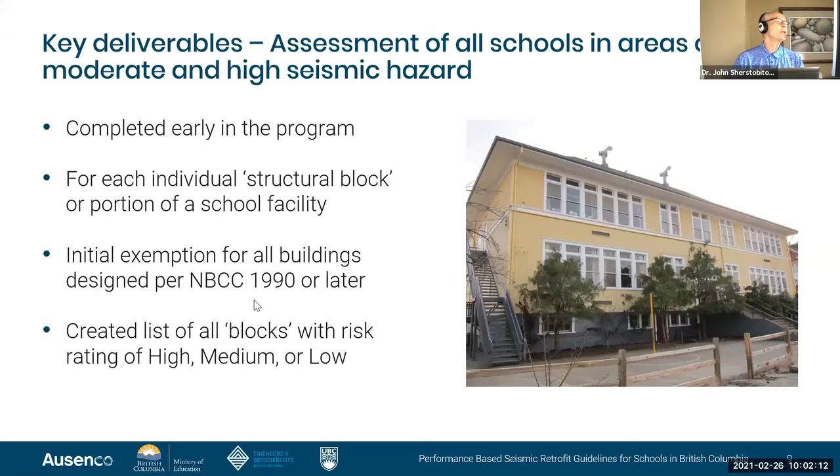Another key deliverable at the beginning of the program was to assess every school in British Columbia in moderate and high seismic hazard regions. Every piece of the school was broken into structural blocks because schools here in BC have been added on year after year, and each one had a different structural behavior. Initially, all buildings designed 1990 or later were exempt because studies showed they met minimum life safety.

A list of all the structural blocks in BC was created with a risk rating: high, medium, or low. Another key deliverable of the program was a custom database. Every school district, every school, every block had all the studies developed for them, and this was available to all the engineers to look at what was done in other school districts, other buildings, what had been done in the past, and it was a great database for the ministry just to record where the program was.

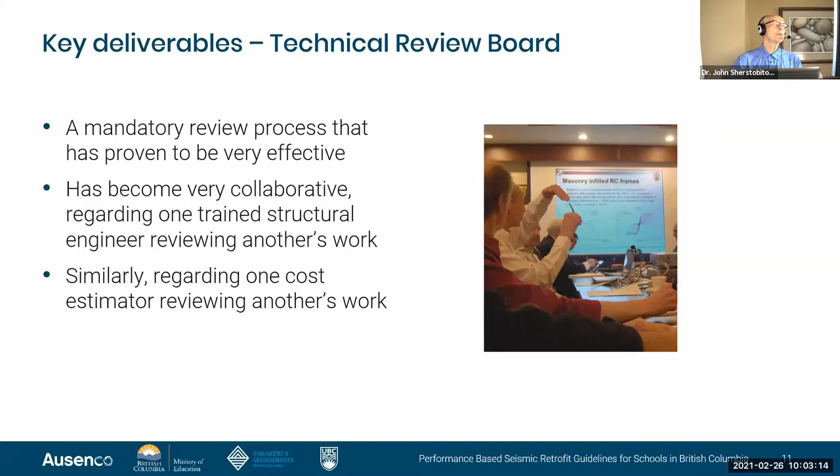Another key deliverable that was very successful was a technical review board. Every study was reviewed independently by another structural engineer, and every cost estimate was reviewed by another cost estimator. It proved to be very collaborative, with engineers reviewing each other's work, to make sure the program was implemented as the Ministry of Education expected.

The policy that the ministry put forth to the school districts: every high-risk building had to have a seismic project identification report done. What the ministry wanted and realized was a standard template. The fees for every consultant were uniform, so it was not about bidding low to get the work - everybody had the same fees.

It was led by structural engineers, and at the end of the day, a concept and a cost for a standalone seismic upgrade was prepared, including input from the architectural, mechanical, and electrical disciplines to make sure all the removal and reinstatement of those components was included in the cost. The technical review board reviewed both the structural aspects and the cost aspects.

Following that, a project definition report was prepared to send to the ministry to obtain funding for the seismic mitigation of the school or replacement. This report looked at options for an individual school: replace it, or is it more cost effective? Is it better to do a standalone seismic upgrade, or some combination? This included all the costs for phasing, accommodation, moving costs, and maybe local authority requirements like sprinklers or universal accessibility. This was now the true complete project cost for the ministry to provide funding to the district to implement the project.

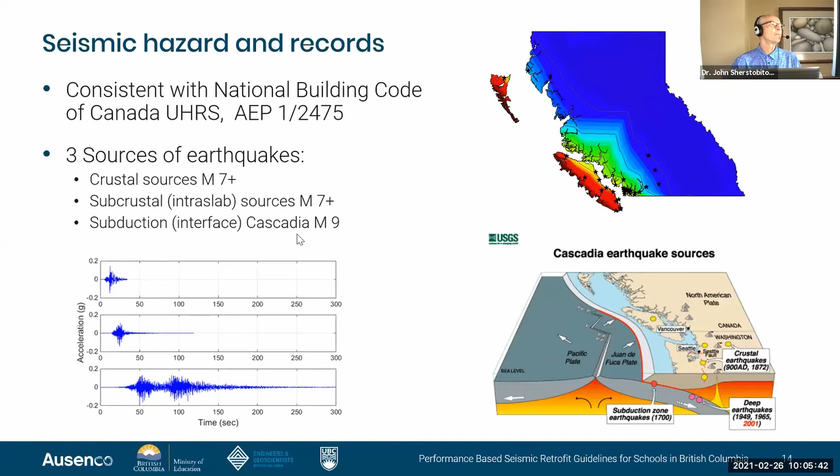So the analysis was done, and you'll understand this as I go forward. For each of those 3 earthquake sources, 20 ground motion records were selected, scaled to both high and moderate seismicity levels, scaled to a conditional mean spectra at either 1 second or 0.5 seconds. At the end of the day, for each of the prototypes selected for the studies, 240 ground motion records were analyzed to assess the behavior of each prototype in the system.

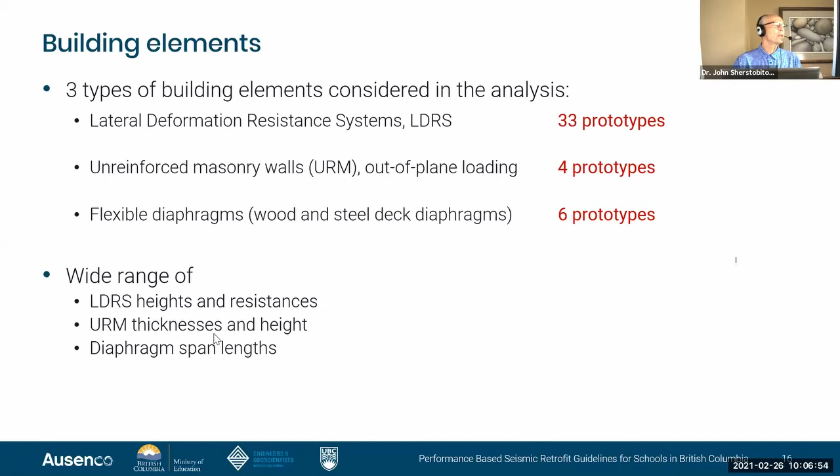In the prototypes, there were lateral deformation resistance systems, shear walls, bracing, and the like. There were 33 unique prototypes consistent with existing construction and new construction in BC, including unreinforced masonry walls that could collapse out of plane, and flexible diaphragms - wood and steel deck, typical for what we use here. A wide range of heights, resistances, and URM thicknesses were assessed as part of these analyses.

For each prototype - the lateral deformation system prototypes or diaphragms - backbone curves were developed either from experimental data or from literature, including the strength degradation of each of those prototypes. At the end of the day, a design drift limit was specified to achieve life safety, and there was a conditional drift limit to achieve collapse prevention for each of these components.

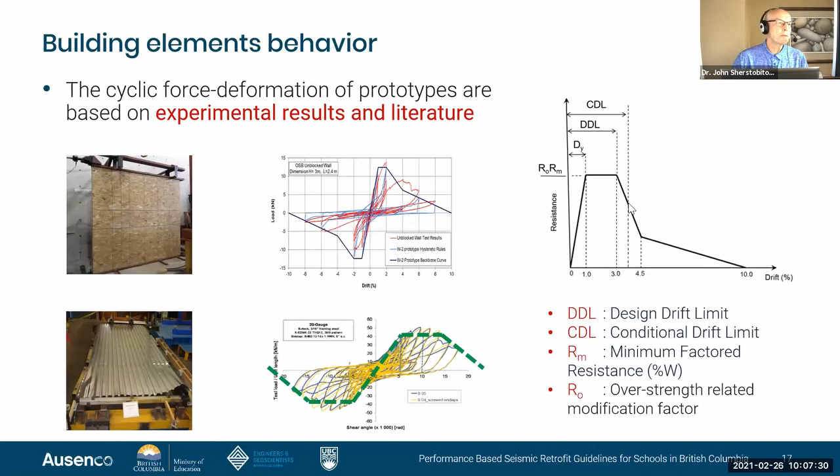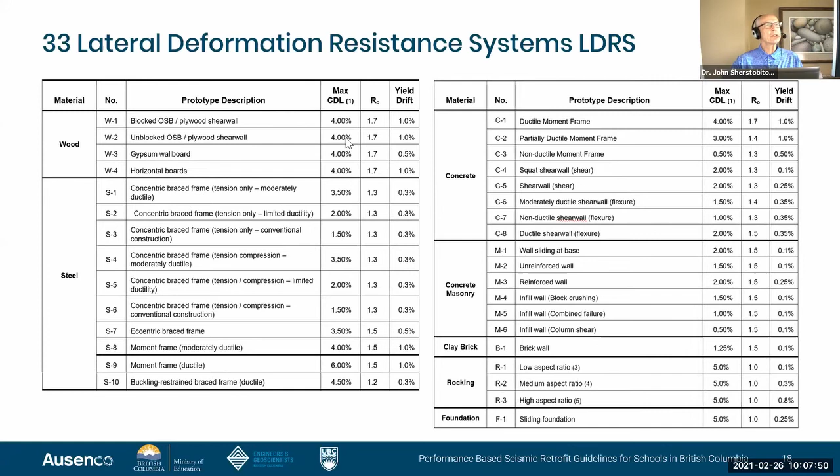This is just a snapshot of the variety of wood, steel, concrete, masonry, and clay brick prototypes that were assessed in the program, and the kind of maximum drifts that were allowed in the study for life safety performance.

Of course, the key in every seismic upgrade is to make sure that the vertical load carrying components remain able to carry the vertical loads. These are the drift limits for the various types of components to make sure they could carry the vertical load in the event of an earthquake.

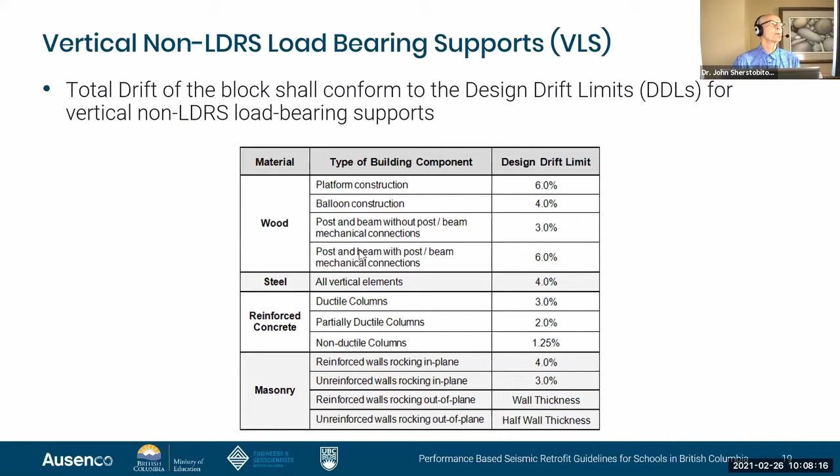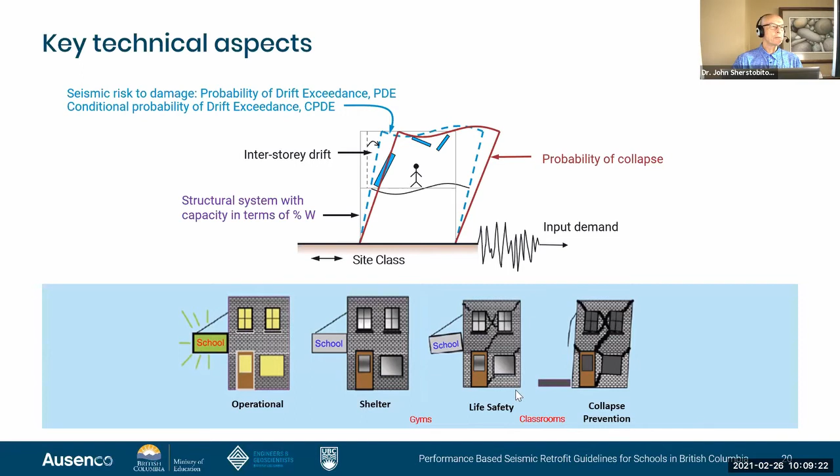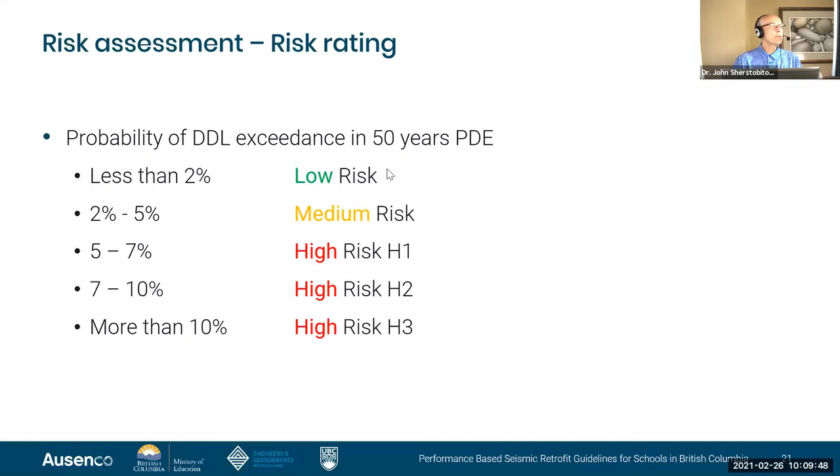So for all the buildings that were assessed, this probability of drift exceedance in 50 years - 2% in 50 years - was deemed a low risk, and we have the various categories of medium and high. The program right now is upgrading everything estimated as high risk to bring those to a low risk.

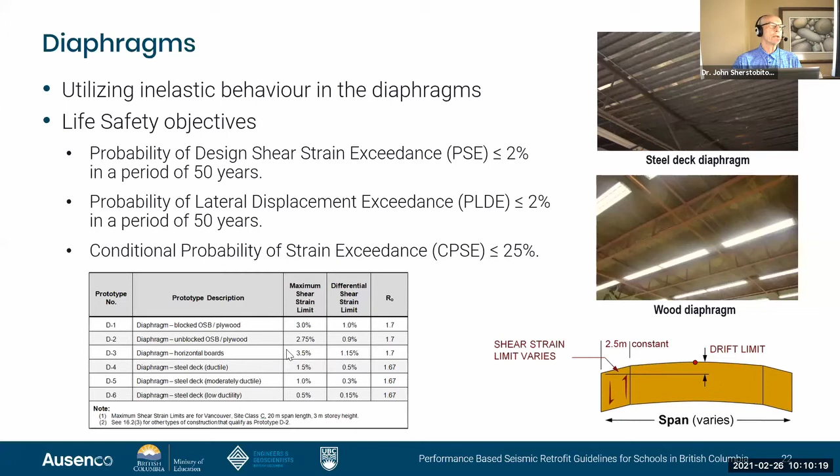Similarly to the lateral deformation system, the diaphragms were all analyzed for inelastic behavior to get the maximum capacity out of this in an inelastic behavior. Again, probabilities of strain exceedance or displacement, either a probability and a conditional probability, and the various diaphragms are shown below here, along with all those analyses I mentioned.

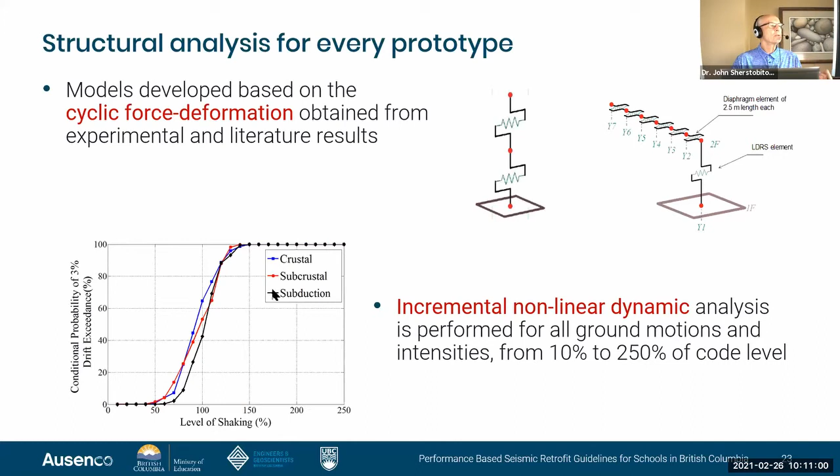So what did this analysis entail? Those nonlinear backbone curves, the nonlinear degradation performance of all the prototypes I previously mentioned, were analyzed both as lateral deformation systems and as diaphragms. What was done was incremental nonlinear dynamic analysis from 10% to 250% of that code level earthquake, to get these curves for each of the 3 types of earthquakes, to move into the probabilistic combination, ultimately to get a probability of drift exceedance in 50 years versus the factored resistance needed for that particular component. So everything was a probabilistic approach, consistent with the probabilistic approach of the National Building Code.

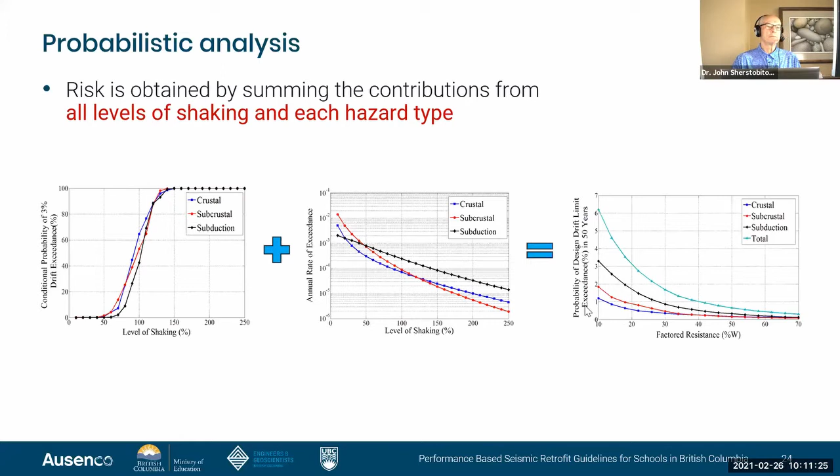So as I mentioned, the fundamental goal was a life safety performance objective: a probability of drift exceedance of 2%, meaning the probability that this drift over the 50-year lifespan of the building would be exceeded for all the earthquakes we can see in British Columbia.

In addition, there was a conditional probability check for just the 100% earthquake level, with 60 earthquake records run for that level, and a probability of drift exceedance of 25% as the strength degraded. So a little further performance, but still far away from collapse and collapse prevention.

As I mentioned, for gymnasiums, auditoriums, and cafeterias and the like used for shelter in place, an enhanced performance required that the components behave halfway between the yield drift and the design drift limit, so about in this range.

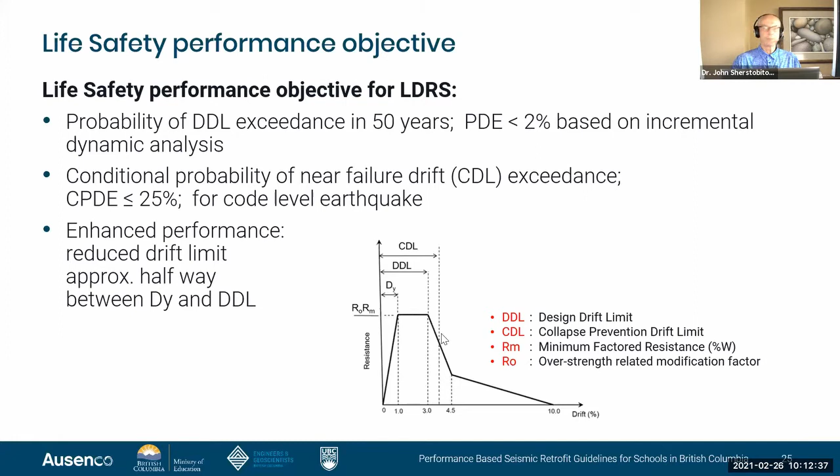So the seismic analyzer, I'll talk more about it. This was a tool to access all these pre-analyzed nonlinear dynamic analyses, used to perform risk assessment and obtain the retrofit resistance for drifts that would provide that life safety performance level. I'll speak more about this shortly.

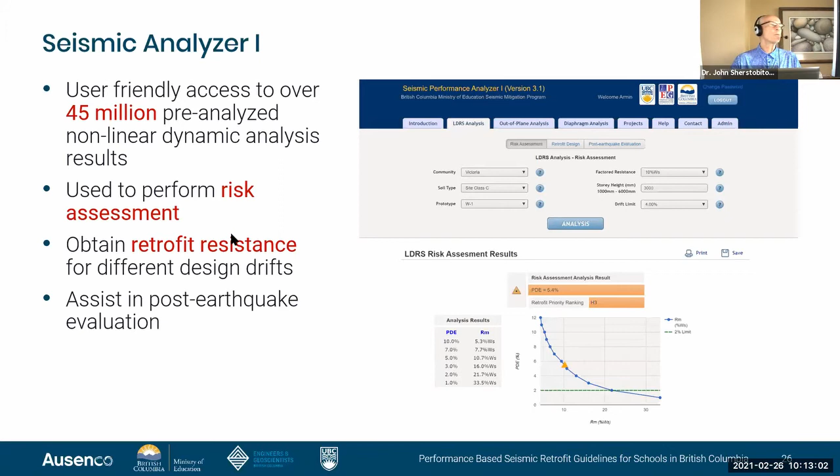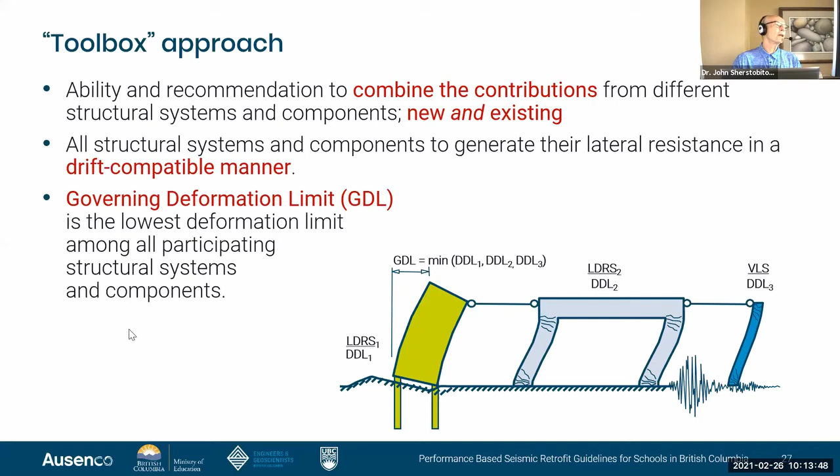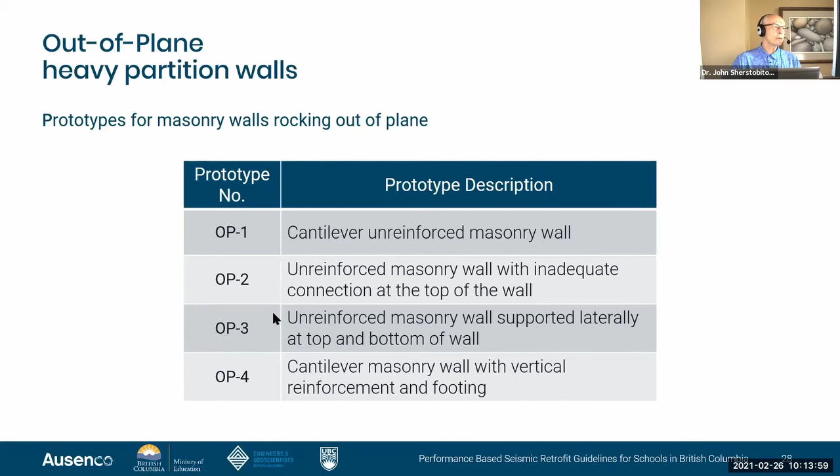Out-of-plane heavy partition walls, we have kilometers of these in our BC schools. There were 4 prototypes assessed. The most typical one is this prototype we called OP3, for out-of-plane rocking. As soon as the drift exceeded the thickness of the wall we get collapse, so we used that same probabilistic approach to make sure those had that 2% in 50-year performance of not exceeding that drift.

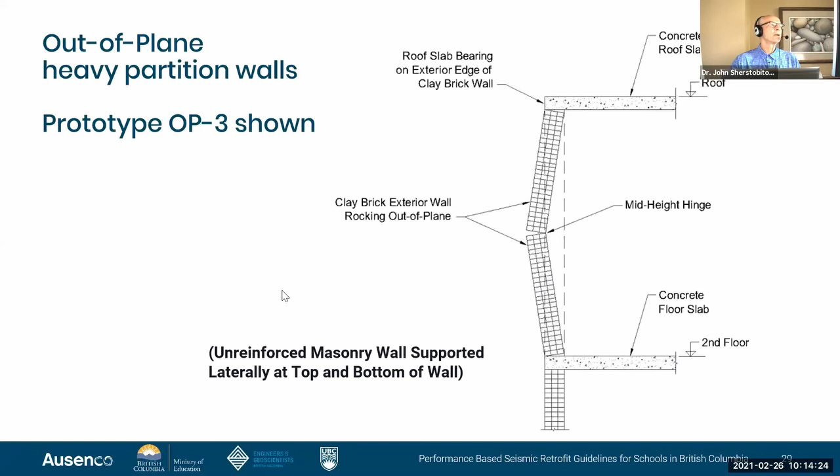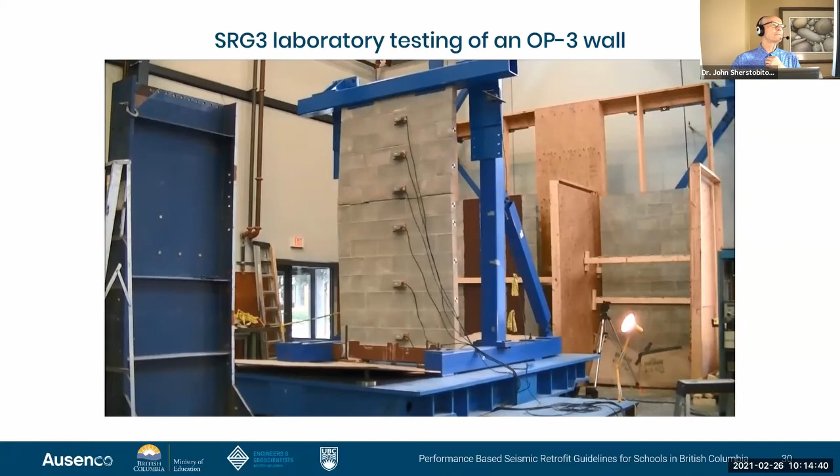There was a lot of testing done at the University of British Columbia on the shake table. Again, these are masonry walls that we have miles of in BC. We assessed many simple retrofits, this one being unistrut on one side of the wall.

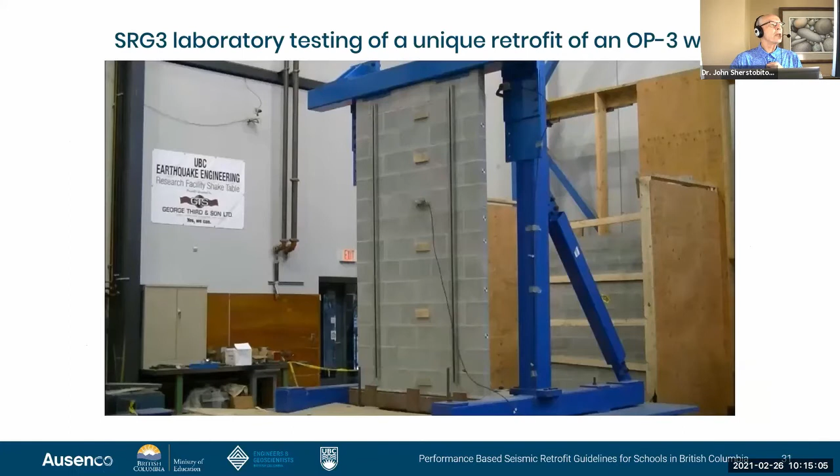The beauty of that testing is that we found very cost-effective solutions to implement on only one side of the wall to minimize disruption and interruption to the school program. Again, the one Chet showed was simple unistrut with masonry screws, not even connected to the floor above or below.

Another really important part of the program was a special study we did on liquefaction. We have many schools in liquefiable areas. What we found is that predictions using some of the previous empirical equations were too conservative for what we deemed inland schools - schools more than 300 meters from the river or ocean and with a non-liquefiable crust of 3 meters or larger, which behaved very differently than those schools near the water's edge.

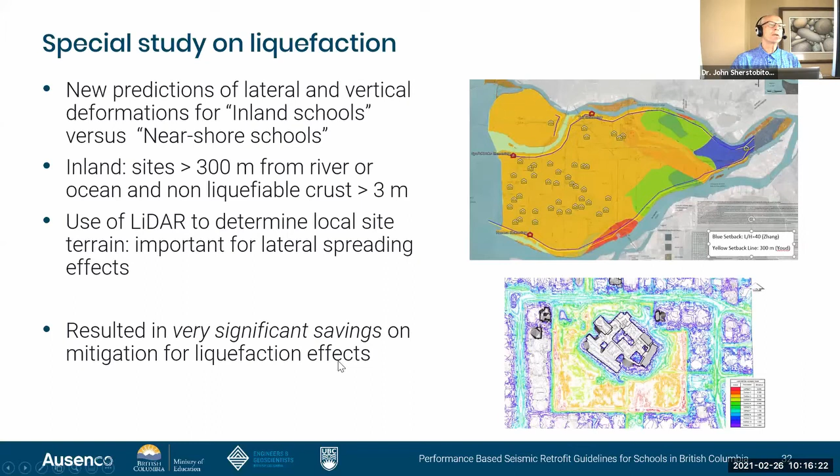So we used LIDAR to determine all the local terrain. We did analyses for a variety of schools and implemented simple guidelines that resulted in very significant savings for the mitigation of schools where liquefaction potential exists. This was an excellent study that just completed about 6 months ago.

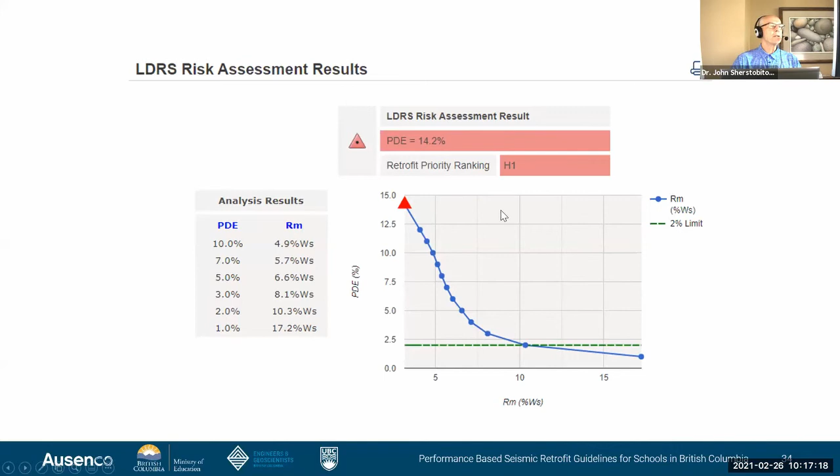You push the analysis button and it'll tell you whether you meet that probability of drift exceedance of 2% or not. This particular example shows no - it should be 2%, it's 14, it's a high risk. Something needs to be done to upgrade this particular structural block in a school.

So then again, for the same area, you select a prototype that is going to be used for upgrading. And again, when you run the analysis, it tells you the lateral capacity as a percent W that's required to achieve that 2% in 50-year probability of drift exceedance for this drift to achieve life safety.

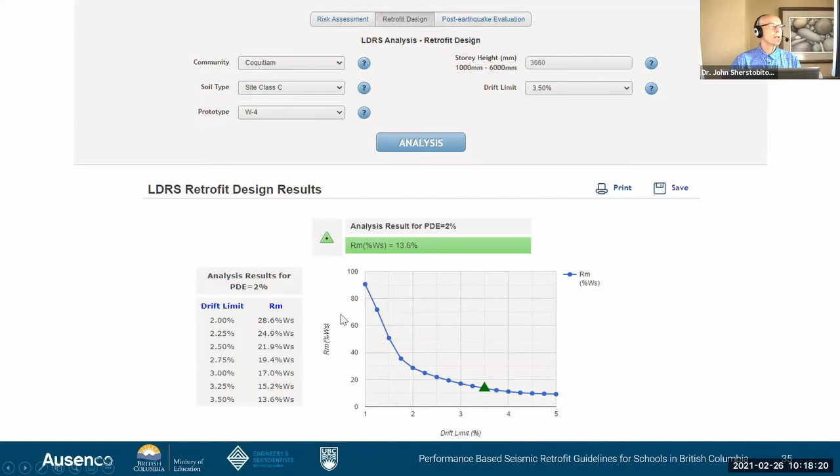If you recall, in the previous slide, this particular building had 4% existing capacity. It needs 13.6%. So the goal is you only add a new structure with 9.6%. You combine the existing with the new in a cost-effective manner to achieve that performance that's expected.

So the intent of the analyzer is to look at all these options.

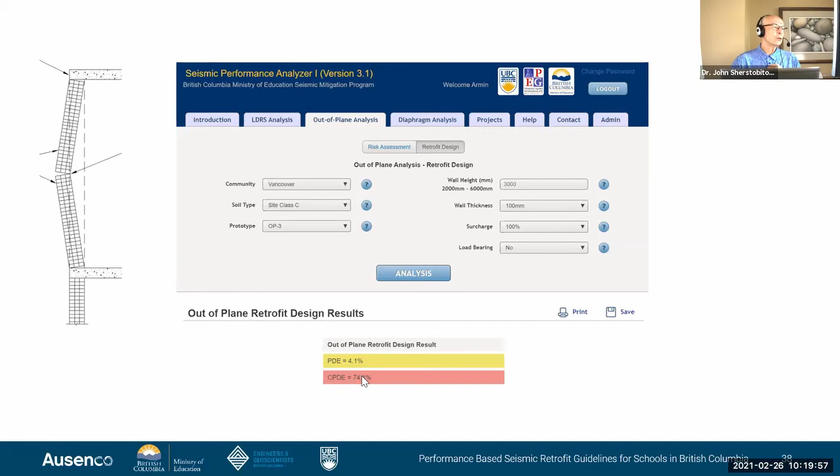This analyzer is also used for out-of-plane walls, again to achieve PDE 2% or 25%. It allows the engineers to look at options of reducing the height and adding restraints to achieve the PDE and CPDE that's necessary.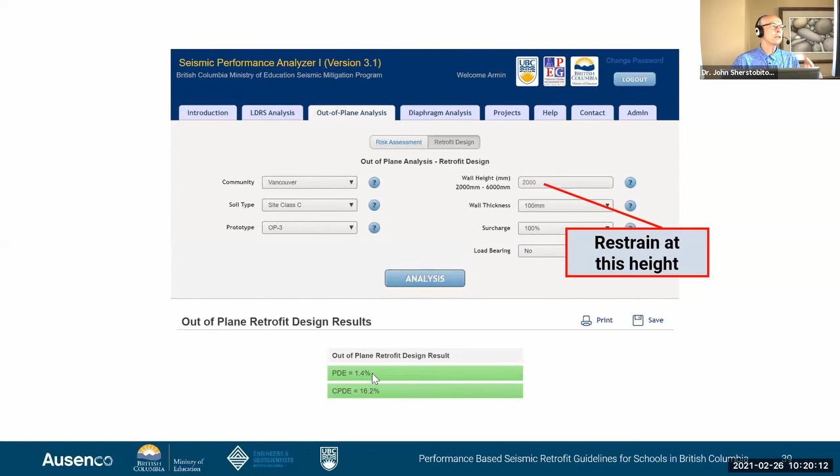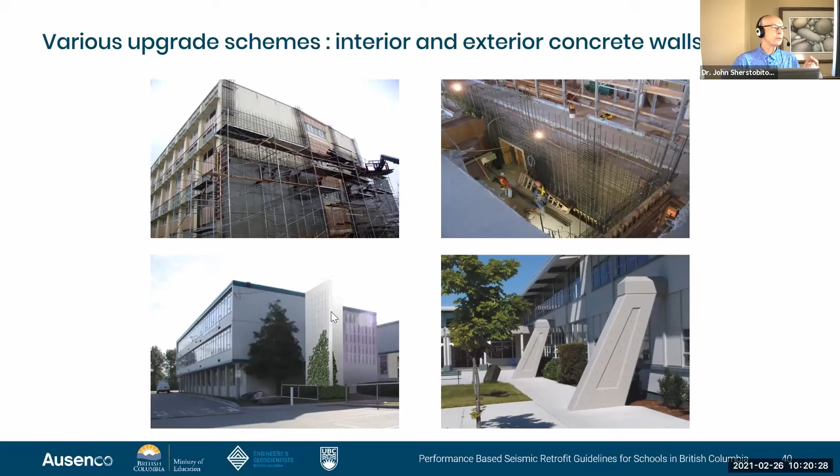These are just some shots of existing schemes that have been used: external wall upgrades, interior upgrades. We used a lot of exterior wall upgrades to minimize disruption to the school, and some external piers. Our heritage buildings were upgraded conventionally on the inside. We used base isolation for some heritage buildings and extensive use of FRP within stairwells, etc., in buildings that we found very cost effective.

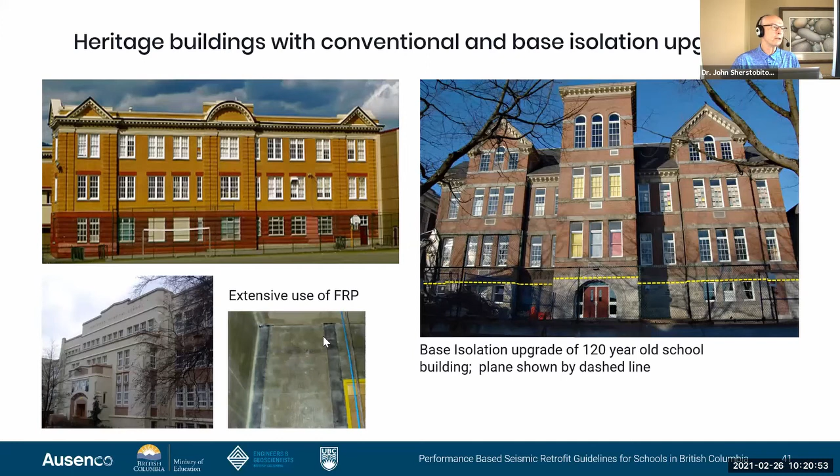There's a lot of schools that required mitigation for liquefaction due to lateral spreading. We developed what's called a ring beam concept, almost like putting a picture frame around the foundations of the school to prevent them from spreading laterally. Structural horizontal beams were put around the building, and in cases through the building in corridors or crawl spaces, to keep those footings from spreading and potentially causing the vertical load carrying elements to fail. At the end of the day, it just looked like a sidewalk to the passerby.

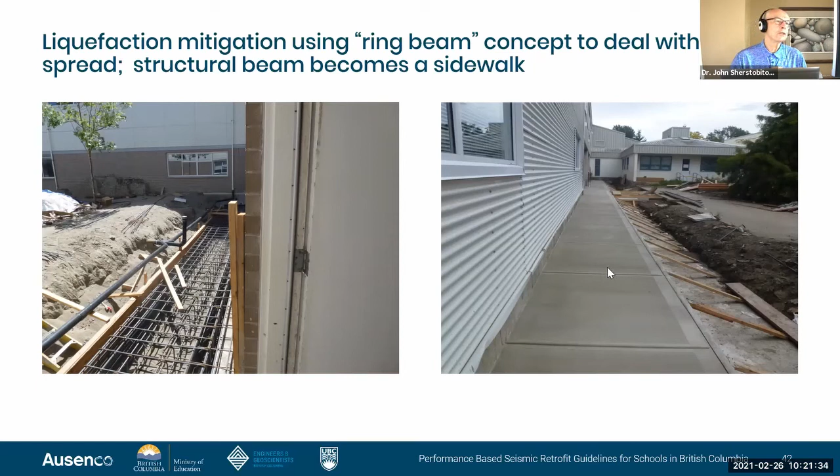The other thing we did is some full-scale testing to verify the retrofit capacity of these upgrades. Here's a two-story school building, just the first story put on the shake table with the weight above it. This was also done to do post-earthquake inspection training. We would bring structural engineers, have them look at the post-earthquake inspection, and make a decision: would they allow students and teachers to go back into this building after the shaking?

This is the maximum credible earthquake for a particular site.

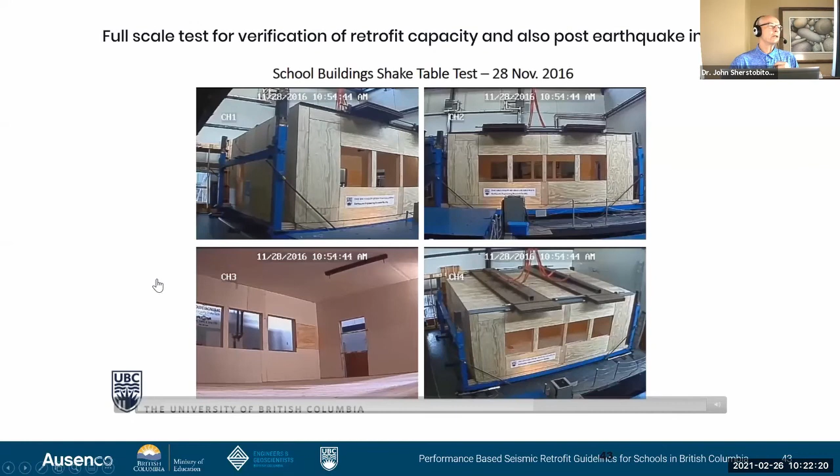So what's the status of the mitigation program today? 186 schools have been upgraded, and each one might have up to 10 or 15 structural blocks. A school consists of many, many structural components, so there might be approximately 2,000 buildings that have been upgraded. 29 are currently under construction, 13 in design, 19 with project definition reports, and the rest are in the program to be addressed.

$1.8 billion spent to date on the program. That's both seismic upgrading, and in cases where some very large secondary schools were involved, it was deemed more cost effective to replace them completely with new schools.

Engineers and Geoscientists of BC has endorsed these guidelines for every building in British Columbia to be upgraded using this performance-based approach for buildings up to 4 stories.

What's the future going forward? The next edition of the retrofit guidelines is in progress, due in 2023, and it's moving away from just that life safety or enhanced performance approach. A larger variety of earthquake intensities will be assessed. Higher performance levels, such as immediate occupancy, will be addressed, and resilience targets for different levels of earthquakes will be implemented.